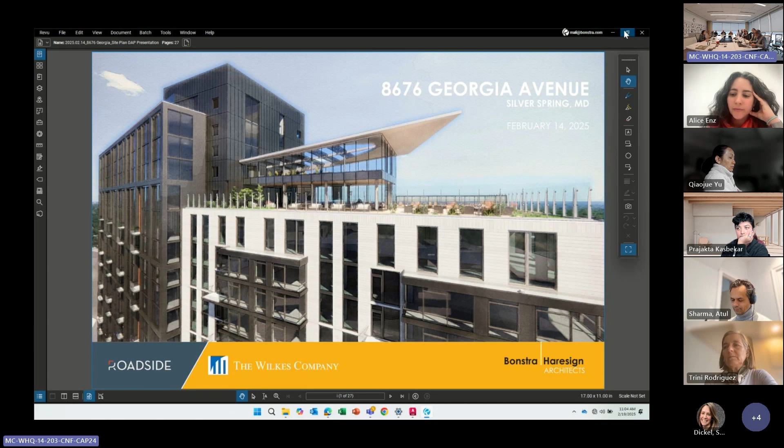All right, so it'll be a relatively quick presentation today because we're just talking about the Georgia Avenue facade and the garage facade behind the Tasty Diner. Next slide, this is just a site plan to orient everyone. Next slide, first floor plan. Next slide, so we're going to start on the Georgia Avenue facade.

So this is an elevation at Georgia Avenue, and we cut a section at the base showing that at the base we'll have the metal and window facade hitting a stone base, and we brought a sample of the stone and a sample of the metal. That stone base is going to wrap around the whole base of the building all the way to Ramsey.

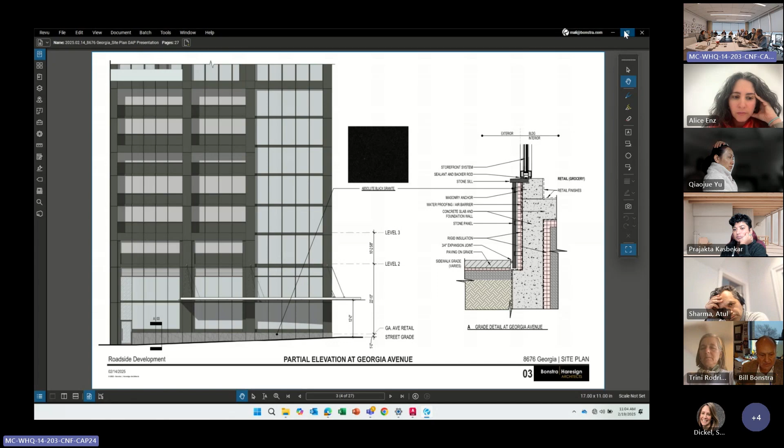So this is scheme A, the same scheme we presented last time on the Georgia Avenue facade with the three-part grid coming down to the ground. The difference in the view here is that we modeled the Verizon building next to 8676 Georgia Avenue, to show there's a difference in material and plane, and it really shows how narrow the facade of our building is on Georgia Avenue.

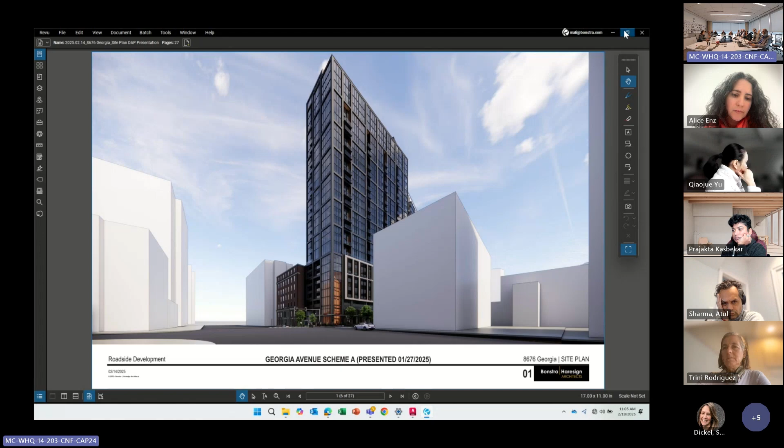And with that plane change, we believe this 3-part grid acts as a corner to this block, Georgia and Cameron. Next slide, so here you can see the plane change between the Verizon building and our building, which is due to the property lines, and how the setback of our building makes the whole face of that building a corner because it's so narrow.

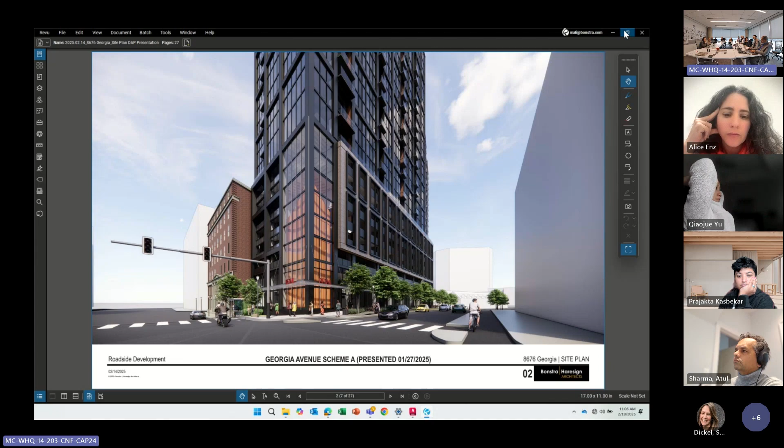Also, last time we talked about the corner treatment between showing lights and showing clear glass. So we are going to show clear glass, and we're showing scheme C, which we had last week here, but it's still between scheme B and C with the angular lights or the straight lights. So for the Georgia Avenue facade, we're just going to show scheme C for these examples.

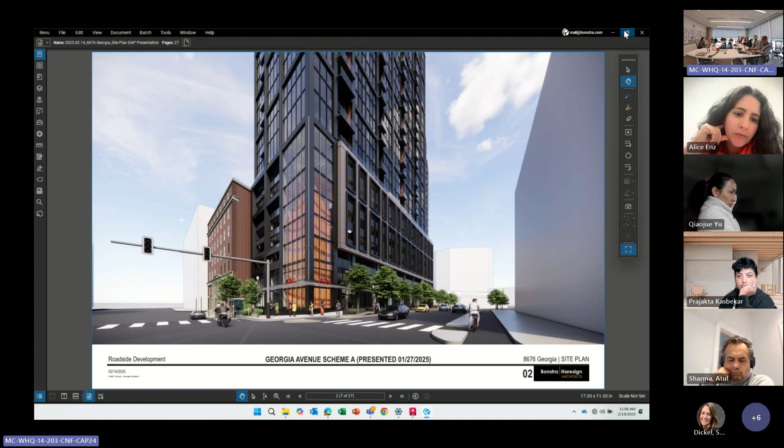Next slide, so here's at night. Next slide, so we did a straight on view during the day to show what this facade looks like next to the Verizon building and with activation inside. So you can do the next slide.

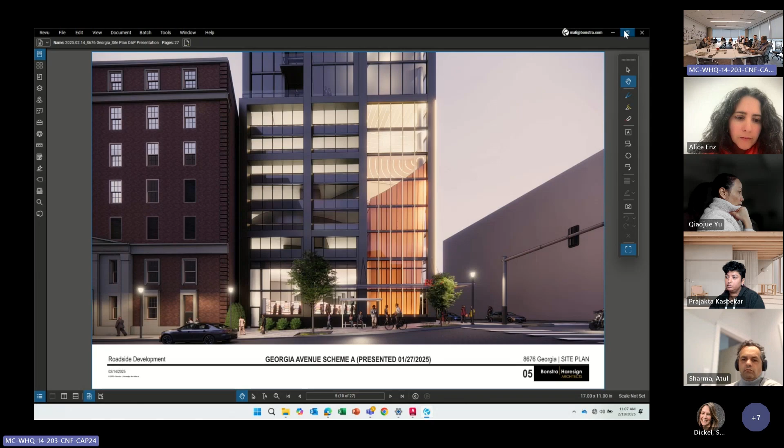So that's where people will be inside with a 20-foot high ceiling at the retail, and you can see through on Georgia Avenue. Next slide, this is a view from the other side on Georgia Avenue.

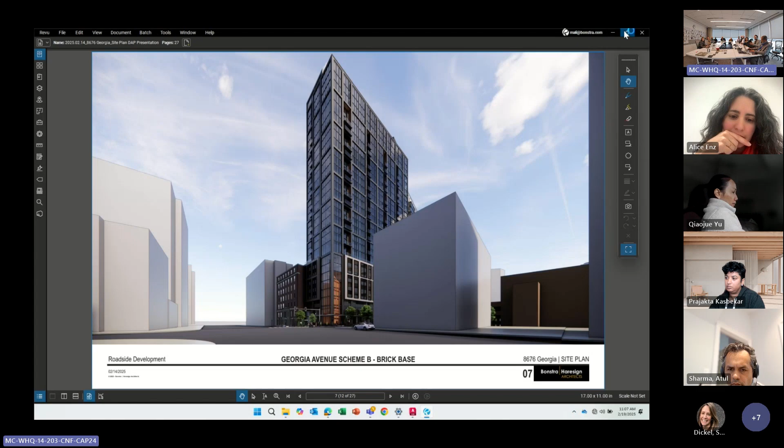And then scheme B, we brought the brick that you can see on Cameron Street over to the Georgia Avenue facade, having it float above the first floor just as we do on the Cameron facade. It breaks at the corner, so the corner comes through to the ground.

Go to the next slide. So here you can see the brick, it's the same brick with the same articulation, framed into the parking garage facade above, and the brick aligns with the top of the Verizon building, so there's a continuation of masonry material there.

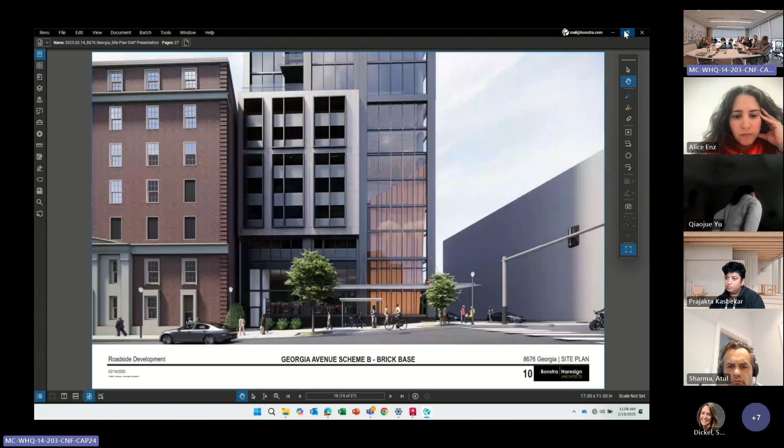Next slide, see the night view. So here you can see the elevation on Georgia Avenue brick, how it aligns with the Verizon building. Next slide. And here you can see it at night, how you can see through the clear glass all along Georgia Avenue here.

All right, so I think that is it with the Georgia Avenue scheme, just those two. And then with the diner garage color, we still believe that the darker bronze material is the right choice here. We've modeled the context buildings next to it to show what it looks like against the browns of the buildings around it, and we think the darker bronze contrasts with the diner and matches all of the rest of the trim and metal for the rest of the building.

And yeah, we've also lightened the wood soffit in these views so that as a pedestrian it won't feel like a heavy mass above you. There's a light wood that's going to be the underside.

Slide. So you can see as you're walking down Cameron Street that the light reflects off of the metal, and the soffit is a lighter wood material.

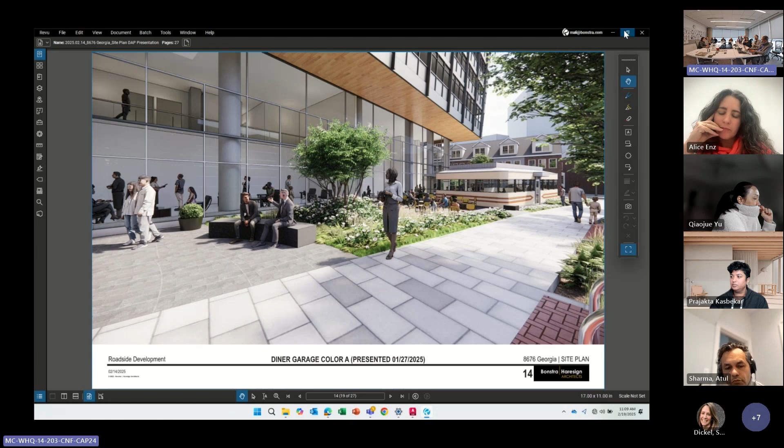Next slide. So this is the view from Ramsey, and you can see the darker bronze matches the rest of the metal on the building, and it still appears lighter because of the reflection than the concrete building across the street.

Next slide. This is the view from further down on Cameron Street, sort of the view coming from the courthouse. You can see all the metal sort of harmonizes on the building, and we just have 3 colors for the whole building: the bronze metal, the brick, and the lighter metal on the west tower here.

Next slide. So we explored looking at a lighter color for the metal as requested, and you can see it lightens it up. It has less contrast with the diner and the stainless steel.

Go to next slide. From the underside it looks pretty similar. Next slide, and then from Ramsey you can sort of see the metal is different than the metal on the masonry piece.

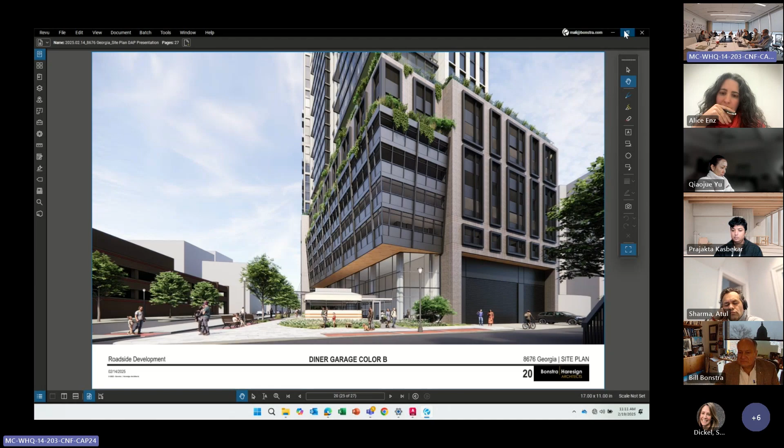And then if you zoom out to the whole building, lightening up that metal sort of makes it stand out, and that's the only place where we're going to be using that lighter metal. This is the ninth. Yep, so that's it, last slide. So this metal is just one shade lighter than the rest.

Yeah, and we brought samples, or a sample, of that metal and the one we're going to be using. Oh, we got the sample with the soffit too. Do you want us to pass these around, or would you like to walk over and look at it? Could you just tell us what the names of the samples are, like the color names and material, what's on the back of the sample?

For the stone, we're going to go with the absolute black. Yeah, I saw that in the package. And then the metal? Yeah, so the metal is Alucobond statuary bronze. Yeah, that would be all. And then the darker metal, so the statuary bronze is the lighter metal, and the typical one is medium bronze.

It's all medium bronze, okay. And then this is the West Tower material, same as last time, this is oyster. And this one is wood, if you want a picture of the soffit. So it's either the light oak or the dark nutty pine.

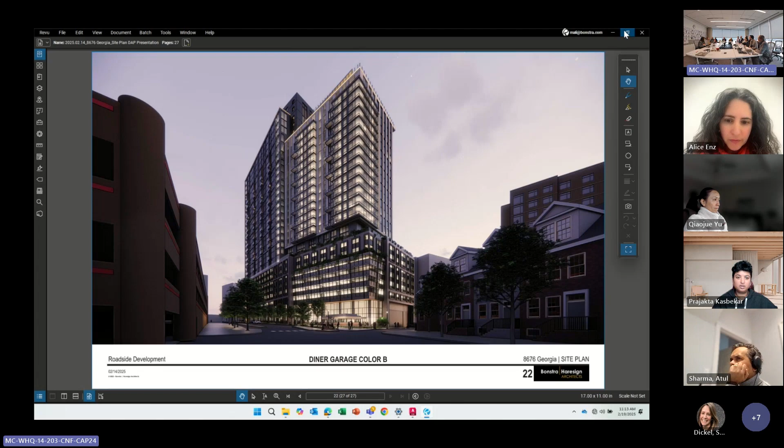So shall we start talking first about Georgia Avenue and get feedback? Sure, yeah, so go back if I could - what's your preference and why, starting with Georgia? We're okay with either of these.

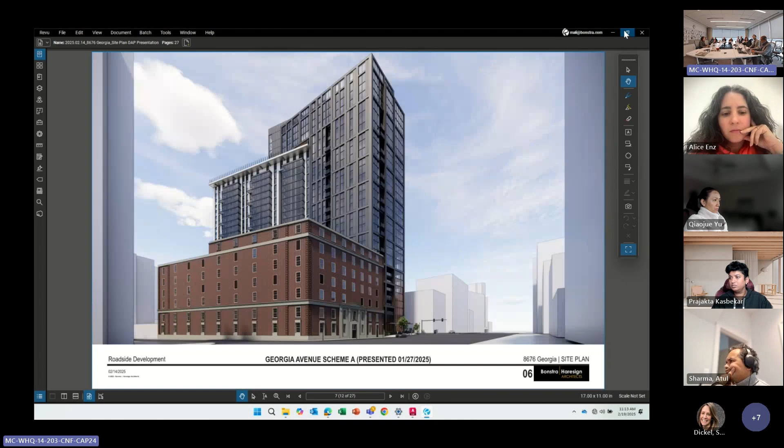We would prefer the original metal one. Do you want to go back to that? Can you do a comparison by any chance, a split screen? Can you open up another window?

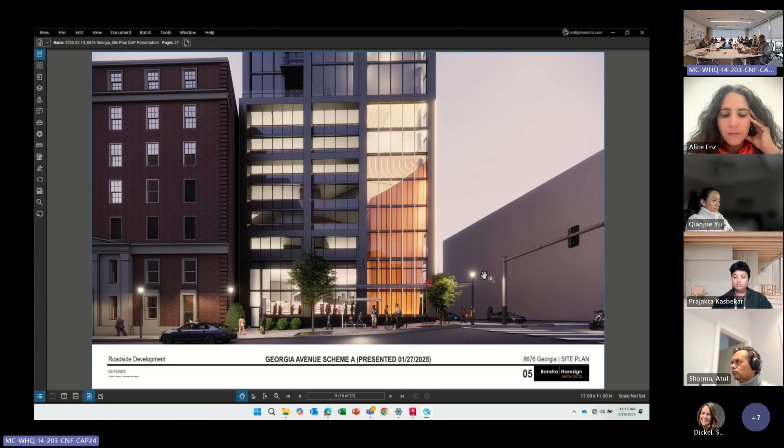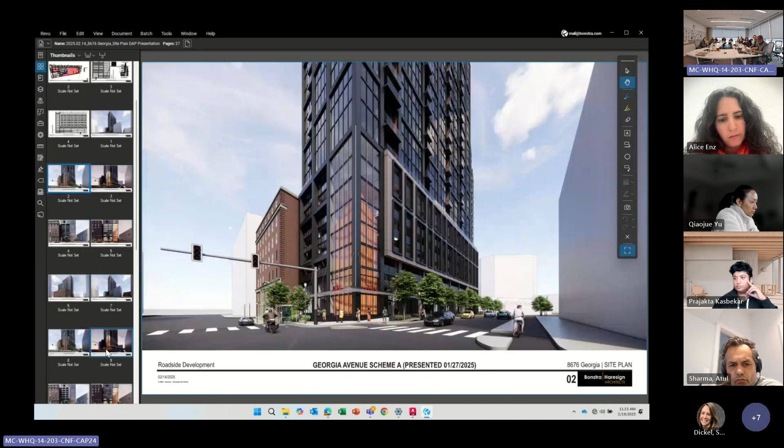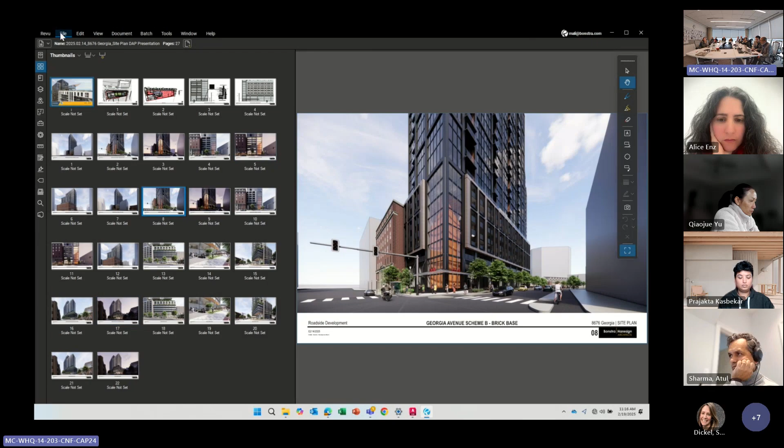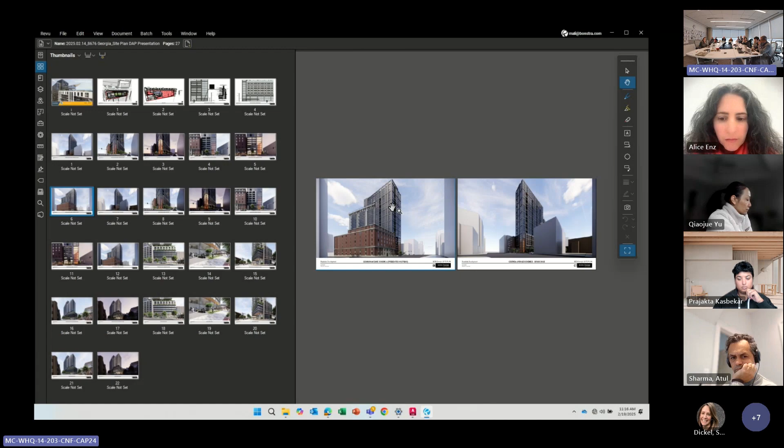Sorry about this. These are the same one. Sorry, your computer's set up. Maybe you just flip back and forth. Why don't you go back to the, we'll go back. So maybe that's it. Can you guys revert back just to full screen and flip back and forth? Go to view.

It's worth a try. Did you want to go back to the metal one? Yeah, so this is the metal, the entire 3-bay coming down. And then the other one we have, the same as the brick from Cameron.

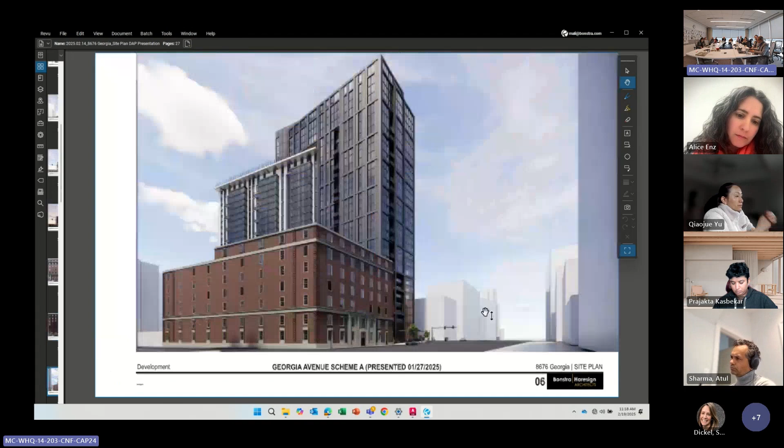I mean, again, if I could just ask clarifying questions, because I can't read your drawings. Yep, so go to one of them. All right, so this is the brick one, go back to the metal one. That's the one. I think the metal one's the one you prefer.

So is there a plane change between the tower and the bottom part? On the third bay, first from the left, yes, that is in a different plane than this. This is in the same plane as that.

That's a small recess. Is that, am I reading it right? Yes. So these glass are in the same plane as the metal? And this glass is set back from the metal grid. Am I reading that correctly? Yep.

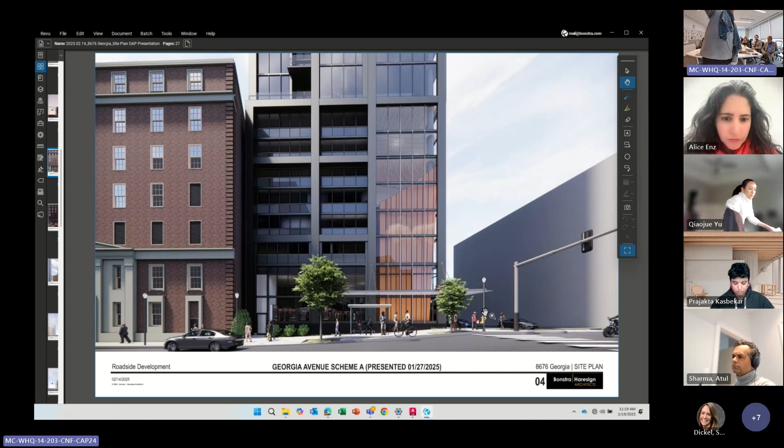Is this in the same plane as that, the metal bands? Yeah, all the metal grid is the same plane. Okay, and then what about this? That's a little bit recessed.

Or that metal band is in the same plane as the curtain wall window. This and this are in the same plane, that's in the same plane as that. Is that correct? No, those are pushed back, recessed. Everything inside the metal frames is pushed back, the main metal frame. That's pushed back and it's essentially in the same plane as this band. Yes.

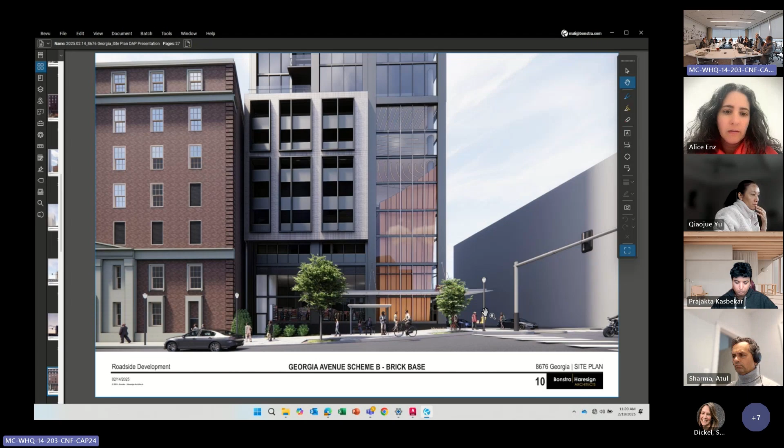So we just feel architecturally this is cleaner because it's just the same 3 bays come all the way down to the ground. On the other scheme, the brick one, go to the elevation view of that, the frames and panels above have a different relationship than just coming all the way to the ground. And because of the width we're working with here, they can't all be the same size frames in this brick piece. So it's workable, it's fine, just not as clean as the metal.

Did you look at taking the brick all the way down to the ground as you did on the Cameron facade around towards the residential entrance and at the egress entrance, or was that not feasible either with the ground floor? Yeah, we looked at it. It makes it so there's a lot less clear glass at the ground floor, and it has a different relationship with the brick around the corner from this. So it didn't make a lot of sense because the brick comes to the ground on Cameron Street, touching the brick, and here it would be touching the glass, and it was just a different relationship, which we don't have anywhere. I got it, that makes sense.

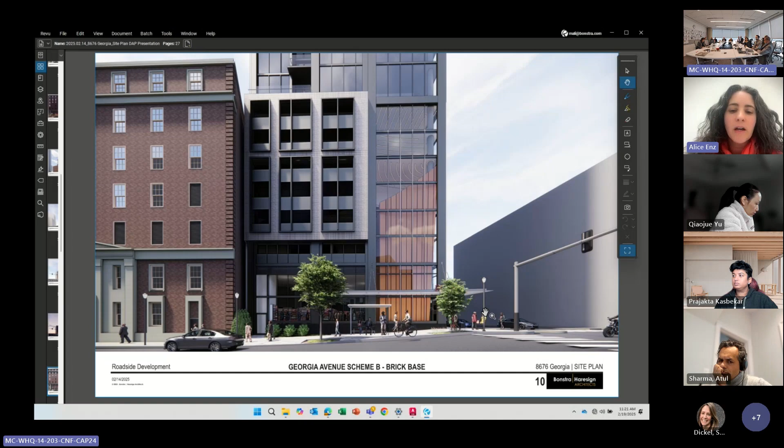Can you go to the angle view, when you're sort of across the street from the 45? Yeah, go back, looking more back across Georgia. That's with the brick. So you can see what's happening on Cameron, kind of like bookending here. And if we look at the other one, which is this here.

I have to say, if I can, I don't know what others think, but my initial reaction, I appreciate the sort of simplicity of the dark metal facade with the 3 bays, because that was the rhythm that you were looking at on Georgia Avenue.

But when you look at it from this perspective, and the night views of these two corners, when you add the brick facade, I'm inclined to that one. If you go to the brick version, even the front elevation at night of the brick one, it just feels a little bit lighter on Georgia Avenue, and it aligns nicely with the datum of the adjacent building.

I feel like it helps the building massing read and how it grounds, and it really emphasizes that corner in a nice way, because above that datum with the brick, you have a step back in the towers that make it not as clear in the massing move. So this helps clarify that corner as a really important piece and grounds that sort of 300 feet of verticality. So I lean a little bit more towards this one, and I thank you for taking the time to illustrate it for us.

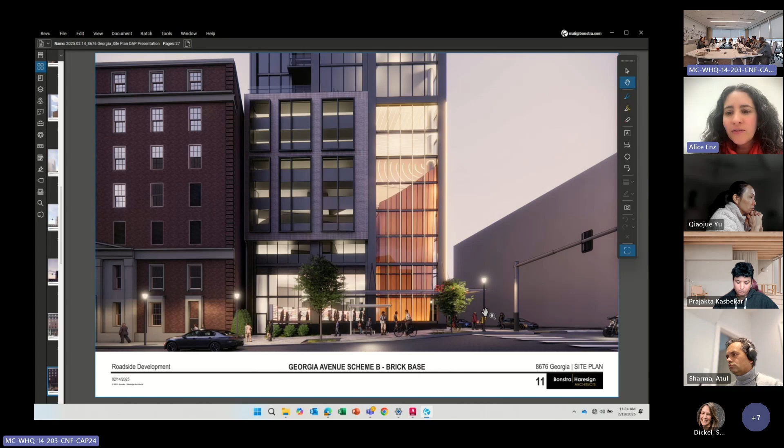If it ends up going brick, my two cents, and I'm not an architect, I don't think you want a plane of brick meeting a flat plane of metal panels. The brick comes out in front of the metal panel, right? Look at the angle view. Yeah, so it's the same relationship if you go to the corner.

But like the daytime one. Yeah, if you go to the daytime one. Go to the one back, so it's lighter. Yeah, got it. Okay. It's the same relationship, what's happening on Cameron's side and that side. What's the width of that metal plane?

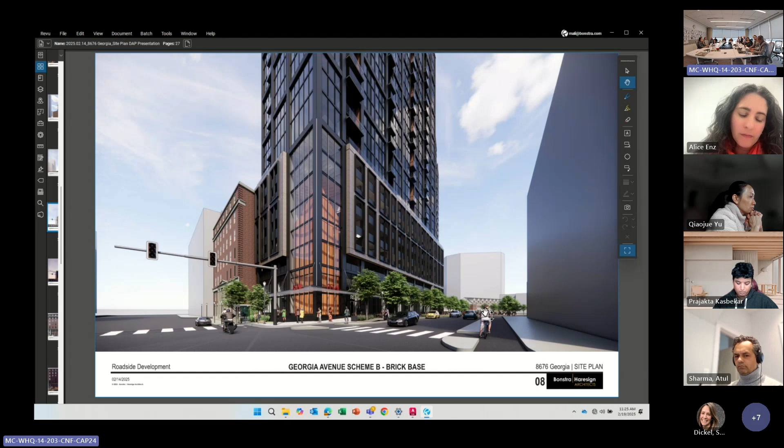Like at the very end where it meets the Rise building, what's the width of that bay, that last brick piece? It looks like it's pretty skinny. I think it's like two feet, or go to the elevation, more for the brick one.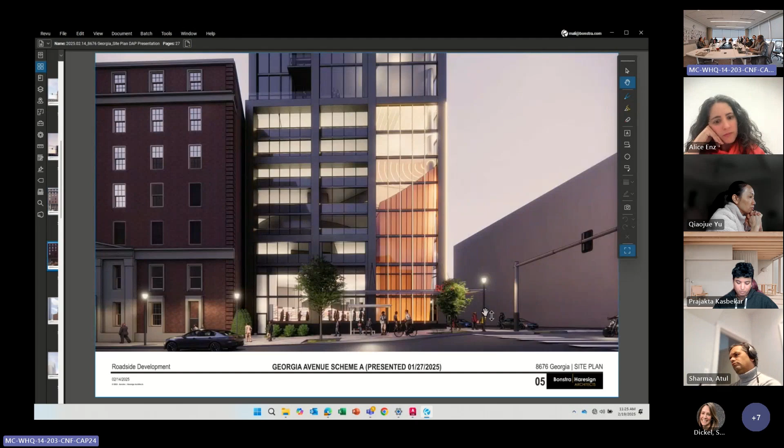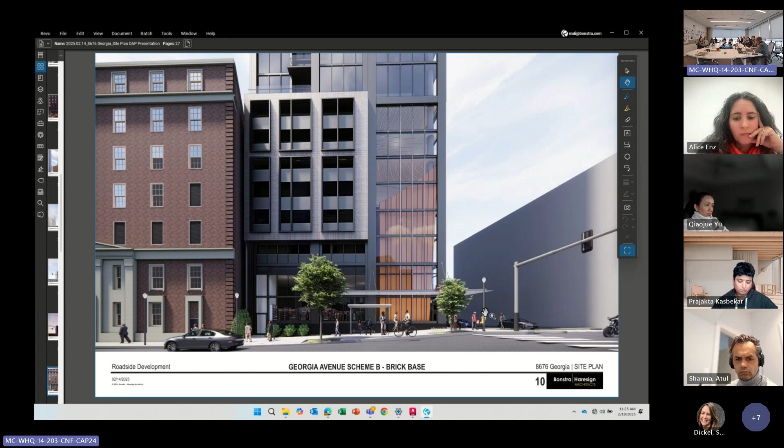Yeah, so that is a little under two feet. We can adjust it. My last question: what's the total frontage of that building on Georgia Avenue, from Verizon to our corner? We don't have the exact dimension, but to put it in context, it's not a lot, it's a small narrow space. That's all. When we talk about corners relative to other buildings, the corner coming down is probably closer to the whole width of our building than it is the true corner here.

So I think we've studied it, and I will turn back over to the DAP members, but it seems to me you have to decide, and this is what I was trying to get at when I asked you why. You have to decide what your privileged position is. It seems to me that one could take the position that the corner is the most important thing, and I want to emphasize the corner. If you take that position, the brick option on Georgia emphasizes the corner without a doubt.

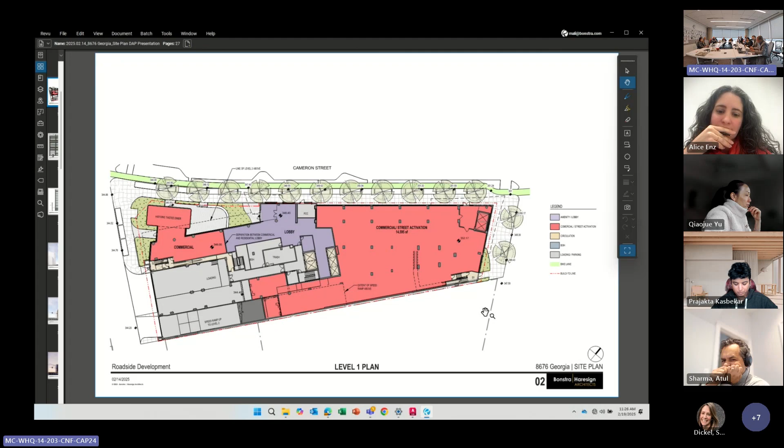And then you show it very clearly in your drawings, if you'd be so kind to go to that. When the brick exists on both sides, the corner stands out and it's framed by that. That says to me, the corner is the most important thing about my building, and that's what I'm going to emphasize. If you go to the metal one that you're suggesting, I think there's incredible amounts of ambiguity.

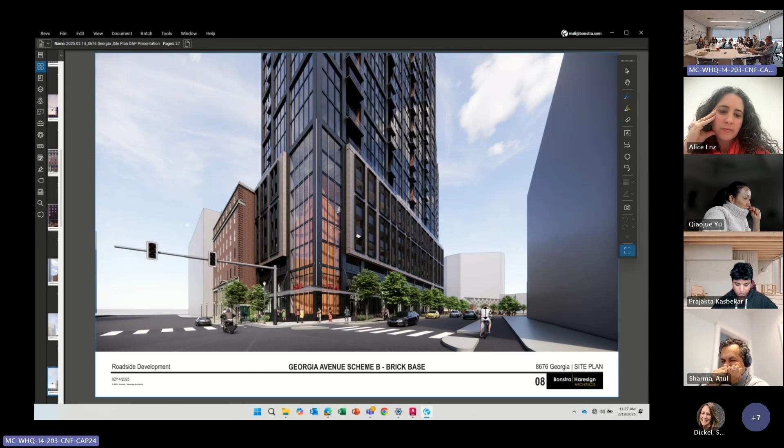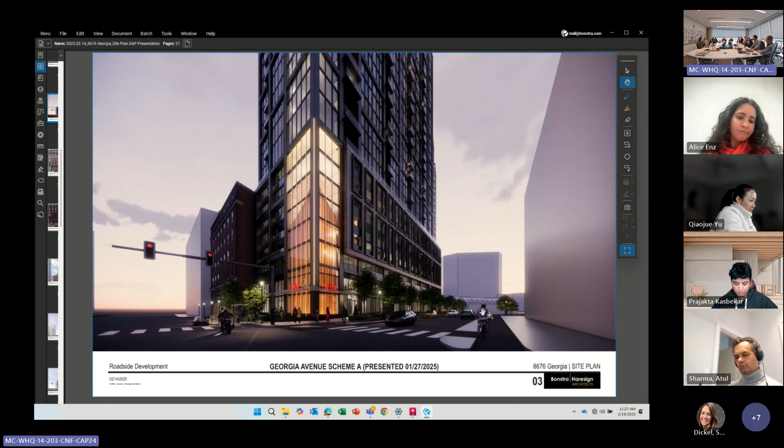Because, as was pointed out by your colleague, the facade isn't that long on Georgia Avenue. So as soon as you make something special out of the bay where the corner is, you get this other relationship for the remainder of the facade along Georgia Avenue. It's ambiguous because it's almost the same size as the corner, and so it leaves you unsure of what's going on and what the purpose of the whole design was. It just seems ambiguous is the best word I can come up with.

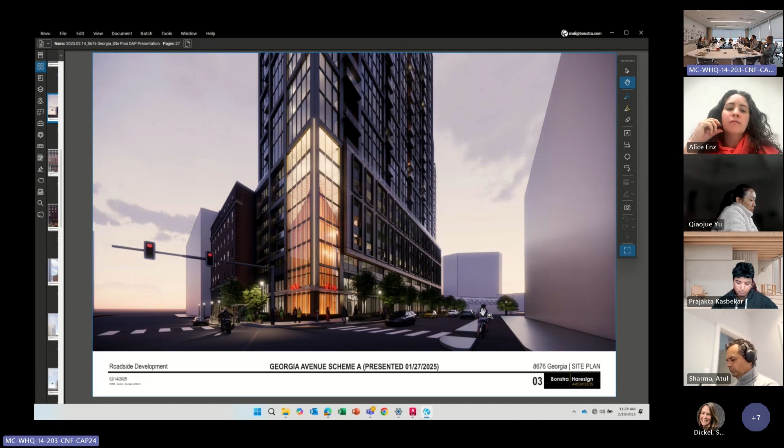From my perspective, if your purpose is to emphasize the corner, and you're spending a lot of money on it, doing special things to the elevation, trying to light it special, treating the glass differently, then you don't want to make another special thing. So I'd agree with Alice that when the brick is shown, it frames the corner nicely, and that's the preferred scheme.

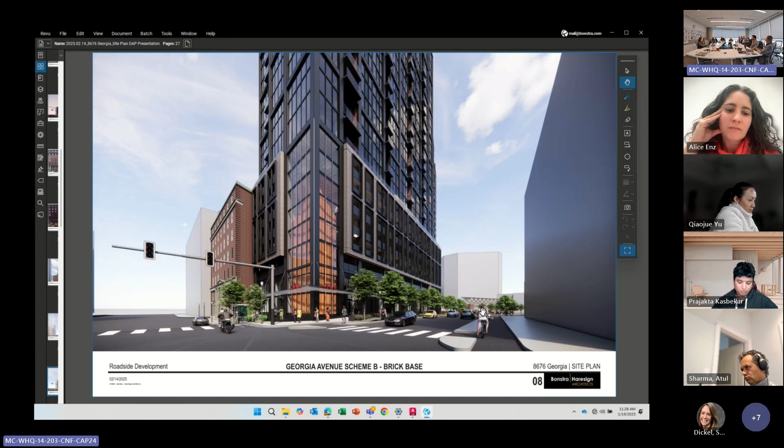Now when I look at the brick scheme you've drawn up, there are some odd things, and I suspect they're architectural issues you can't resolve, but the bays aren't the same. I understand the third bay is smaller, but the other two aren't the same, or your drawing's wrong. If you go to the facade elevation... where are your vertical elements? It's to align with the grid above. So there's some things we could work out. Is that the same as that? Yes, those two are the same. It just seems odd that this is... I don't know, it doesn't change my opinion.

I don't really care that much. I just think if you're going to emphasize the corner, you want to frame the corner, and that makes the better option. I'm not going to nitpick the design.

What are you saying? Yeah, the very right one, the middle line may repeat the same as the middle, so the thin piece. And what's happening, because it's also relating to the upper one, the last two are similar, but you end up with the small pieces at the end, which is a logical place to be. So I would just suggest to you, without further study, that because the left-hand side of the tower is not in the same plane as the brick, it's going to be more difficult to make alignments between how that facade is developed and how this brick facade is developed.

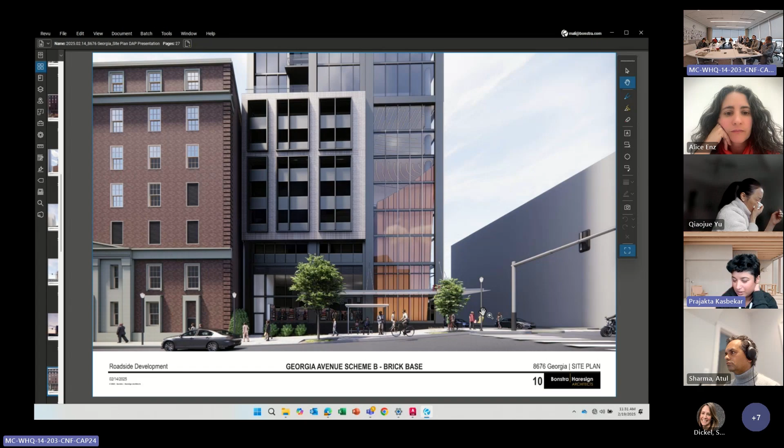For me, again, I can't say I'm not an architect, even though I am trained—I don't practice, for a reason. I like the change of materials and the playfulness that brings with scheme A. I like the dark metal, and then it goes to glass, then you turn around and you have brick, so I kind of liked it. But considering David and Alice are practicing architects, if they feel strongly about that, I will go along with that. But again, I like this—I like the playfulness that this brings with the glass, the lighting, and the contrast between the horizontal, drab brick. So, yeah, my 2 cents.

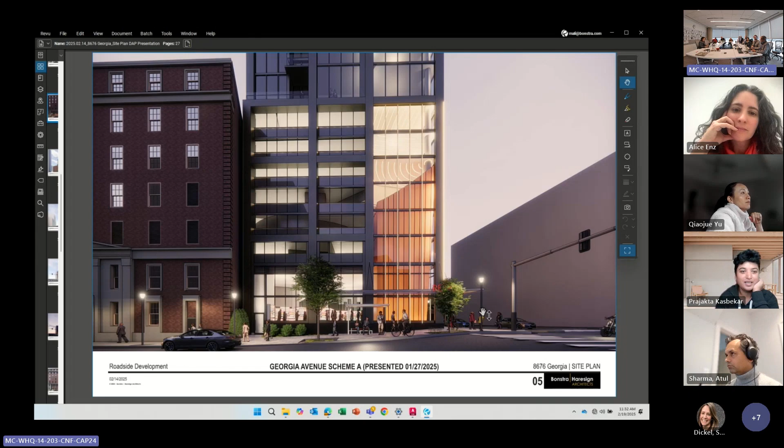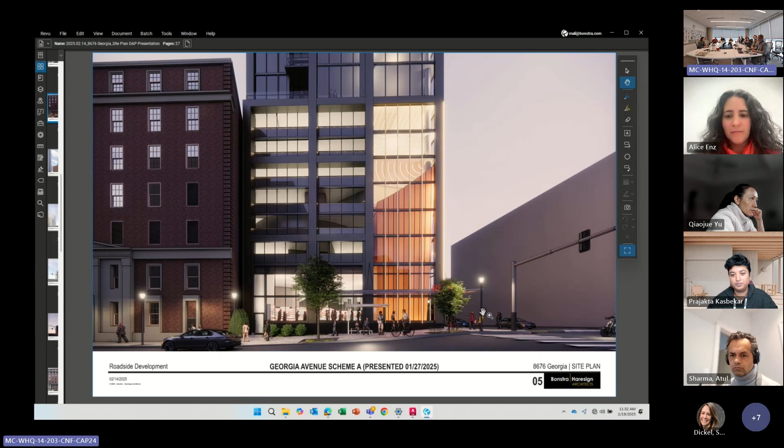Tara, if it's helpful, we do have Liz put in the chat a side-by-side view, if people are just making their final decision. You can access it on your side. The meeting—on my team. Yeah, we can see the side by side. You can see it by the side, okay, terrific. Yeah, great.

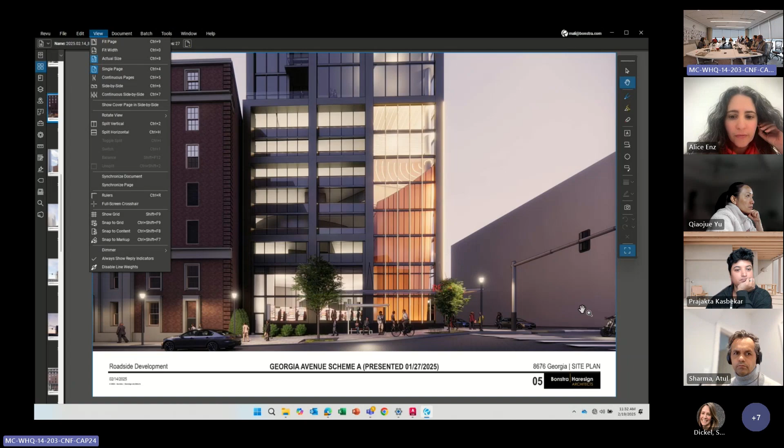Anybody else have anything to add? I agree with Praj. This is Qiaojue—I think the improvement is here, and the color changes just make it look a little bit less heavy. I would also defer to the architects here to make the final decision. So I think overall we are heading in the right direction.

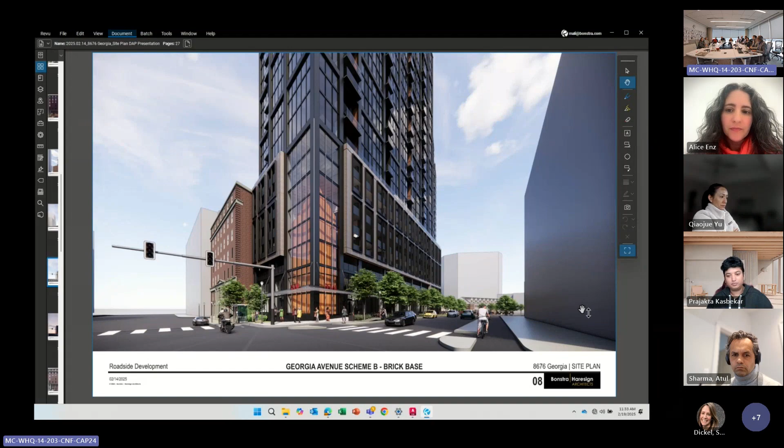So I think we've had a good discussion on Georgia Avenue. What about the first floor of Georgia Avenue? What's happening there? Could you guys explain that a little bit more? Is that just going to be clear glass into whatever the retail establishment is? Yeah, and so there would be a relationship between the two—the corner is clear glass, and also the entire first floor retail is clear glass.

So on that corner there's clear glass, and then there's some sort of a screen around the elevator side. We talked about this—there's an elevator element, and that is the wall of the elevator. Okay, yes. And then to the left, that's the retail, and that would be just clear glass, as you can see—some people interaction visually, at least. So you see here through the retail, we have rendered people walking, shopping, so that you can see.

And then that wall, what is it, about 5 feet? Ends up being about 5 feet to get up to the glass at the ground? Yeah, because the grade is pretty steep. Here, as you can see, it drops about 5 feet, and that's probably the maximum we have stone over at the corner. On the Georgia side it's really low, and then it starts to slope down. That is the maximum solid space.

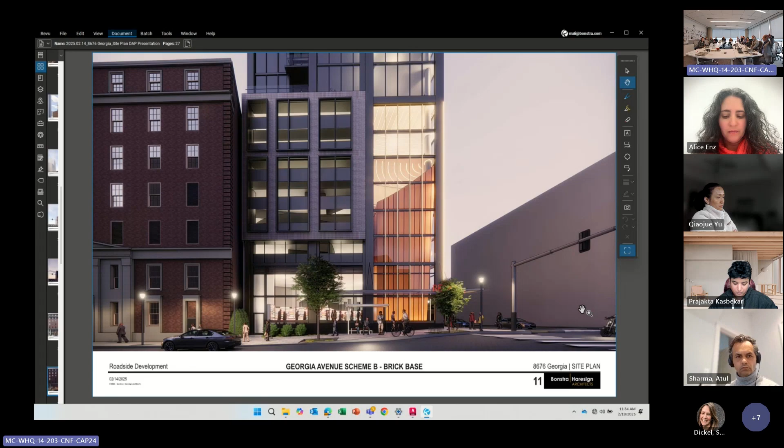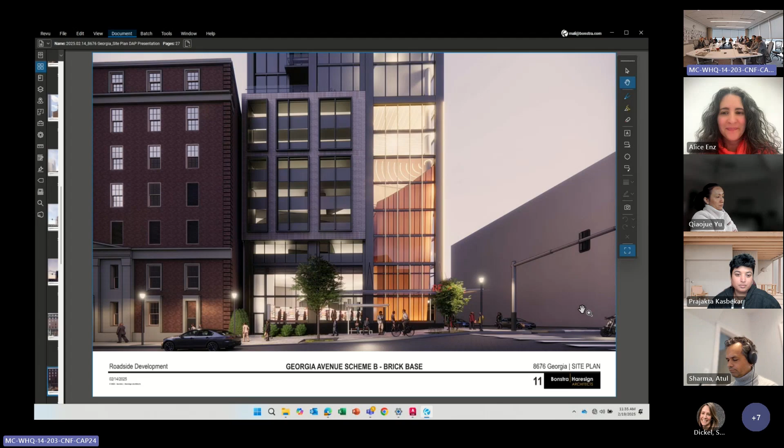So, Tara, just kind of time-wise, I know we're getting now to the last half hour, can you guys give us direction on which scheme you all want, the DAP wants? I think it seems to me like this discussion is leaning in favor of this one.

I think this is also consistent with some of the guides and design guidelines about bringing the tower all the way down to emphasize that corner. And to Alice's and David's points, the way this building is sited, that corner view is actually a view you will get quite a bit. Coming down Georgia Avenue, sometimes the corner view isn't a view you see of a building much, but in this particular location, that is a view shed that a lot of people have, and so I think it's a pretty significant view, and that's the direction I took from this conversation.

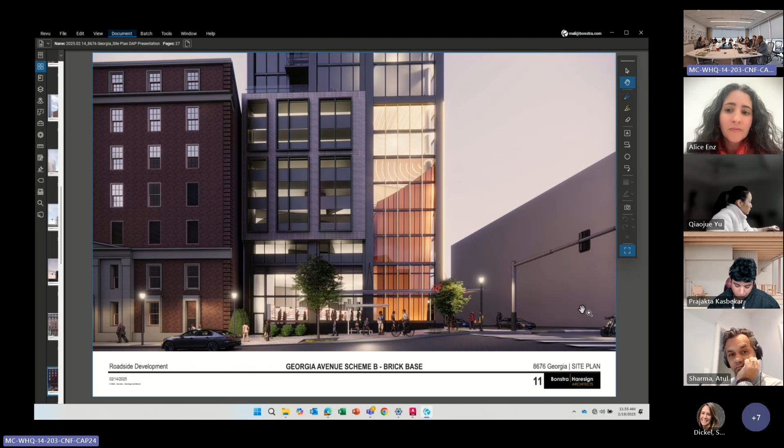All right, over to the next part of the conversation. Thank you guys for bringing it up. So let's move to talk about the garage facade.

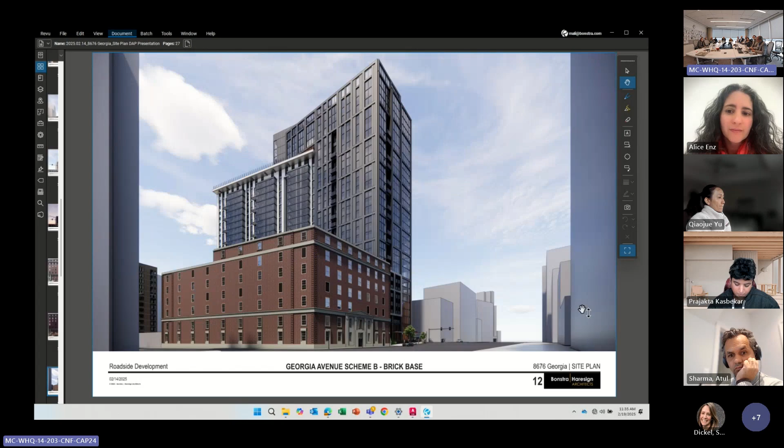I don't know whether Jan, if there's anything you wanted to say about this in terms of the relationship. I said it last time, the HPC weighed in on this in part because their objective is to have the little tiny diner be a jewel box that stands proud of everything else, both physically and visually. And the HPC collectively supported a darker background because the lighter enamel panels of the diner car would read brighter against that. So that was their position and what they voiced support for. I'm here to represent them and their position, and I can answer any background questions you have about that.

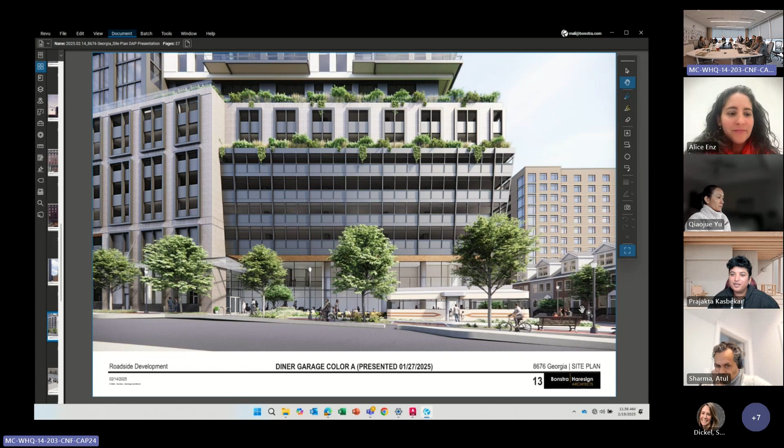So, can everyone hear me? Yep. Yeah, so I do have a question. Just looking at this graphic, you have glass in the background of the car. How is that a dark background? I don't understand the relationship between the dark panels in the garage facade, which are above, like almost a floor above the diner car. The diner car's background is glass and pretty light. So I don't understand that comment at all unless I'm missing something.

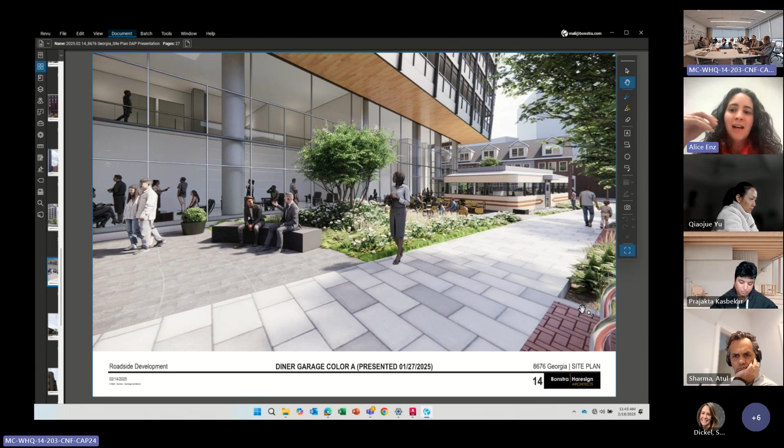I will say, in terms of the color, I think you should go with the color that matches everything else, because the lighter color, medium bronze, is not really a light color. You could have applied the light white tower color above, and I think that might have had an impact. But if it's such a minimal change, the difference between those two bronzes is minimal, so I don't think the color makes any difference. I would stick with being consistent along the base, and not try to introduce a new color.

If you wanted to go light, I would go light, and then - I know you're in a tough spot because of the HPC comments - but if you go to the other view, you can see the light metal tower right above this base is a color that's in the composition of the building, and you could have done something like that. But I would not do a slight version off of the bronze, because that just introduces another piece to the palette. But overall, that's not going to hold me back from approving this project in any way, I just wanted to clarify that regarding the color selection provided.

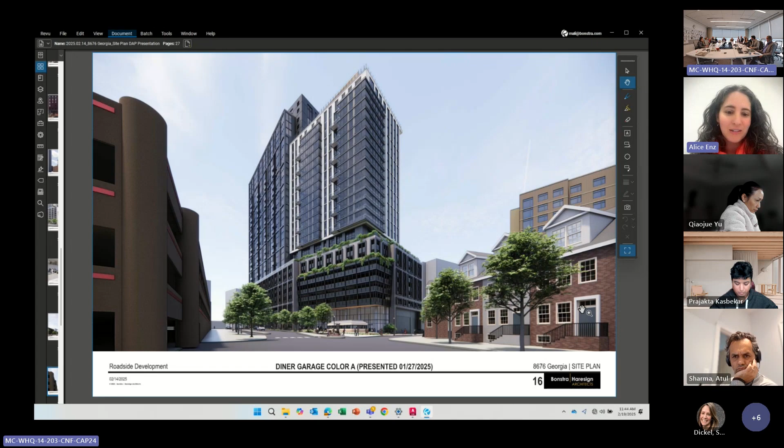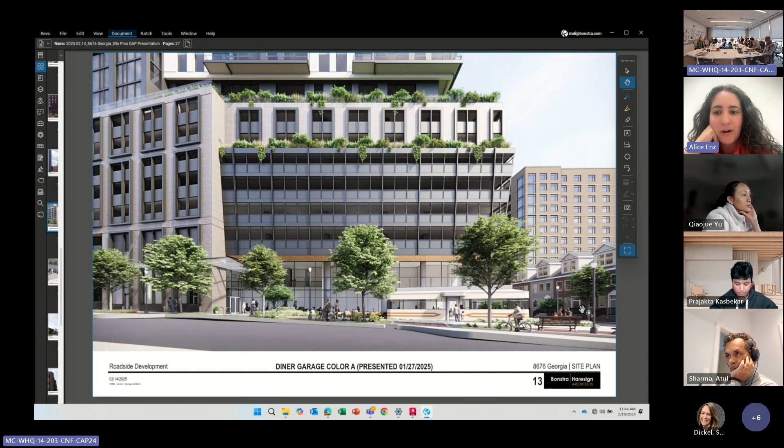So thank you for all the work that you've done to get this to where it is. I know it's a really challenging project to deal with, a challenging solution for that diner on the corner, and how you do something that can tie in, respect it, and celebrate it. So I think it's come a long way.

Once we did have a much lighter color, and then we presented it, and with HPC, we came to this. So at one point, we did have a color that matches the lighter tower, but then we came to this. So I think what you said, that's what it is - the coherence of the architecture with that color makes sense.

Frankly, that's why I asked about the background, because I remember you guys doing something lighter on top, and this comment about the background color needing to be darker. My point was the background is glass, and David, I understand your point about it being darker, but I still don't understand how that's related to the panels used a floor above the diner car. It's not a background, it's hanging over the diner car, so I still don't understand that comment.

Again, it's not a hill I want to climb whatsoever, so I agree, I really appreciate this soffit. I think my initial comment was pretty much about pedestrian access. I have been a pedestrian on this road, so I was thinking about that, and I think the soffit helps.

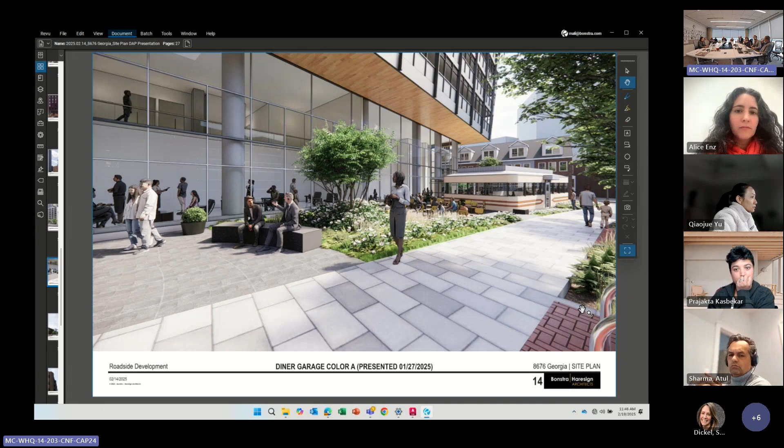Joy, do you want to add anything before we move to wrap up? I apologize, I've been coughing the whole time. No, I don't have anything else to add.

Okay, so today we've already gotten clarity on Georgia Avenue, and it sounds like everybody is okay with sticking with the original color. I do think the soffit treatment, which might have been your original plan always but wasn't in the rendering, seeing it helps give us a sense of what it would be like in real life. I think that helps a lot.

I appreciate that you guys added that, and I'll say I appreciate that you ended up modeling the context, not so much the townhouse side, but the Verizon building was really helpful. I'm sort of sorry we didn't all think to ask to model the Verizon building front so we could see that, but it really helped with the discussion on Georgia Avenue. So I think that was great on your part, something we hadn't asked, but very helpful for these particular issues.

Okay, so I think we've kind of resolved this. I know we talked a little about the options, and everyone said transparent corner. You guys can decide what to do with your light stuff when you move ahead, as long as it's going to be transparent. We've already covered that last time, just in case there were any questions.

So I think now we're just going to vote that this project has met the goals of design excellence that we've been talking about this whole time. The DAP members just have to vote yes or no to move the project ahead and let them move ahead on schedule with their site plan appearance at the board.